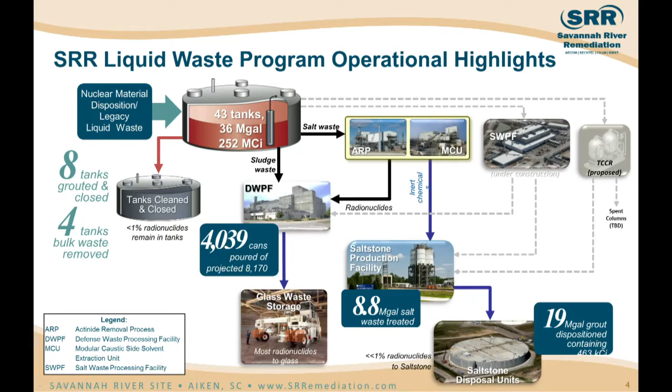But DWPF has processed around 4,000 canisters, which is right around half of what we're projecting it'll have to produce in its mission. The other 33 million gallons of waste is collectively called salt waste. That's divided into two portions. About half of it is salt cake. It's precipitated salt solids that are also in the bottoms of the tanks. If you think of a salt block like you'd have for livestock, it's very hard like that. Then the remaining 17 million gallons of salt waste is dissolved salt solution, which is sitting on top of the salt cake.

Before the salt cake can be processed, it has to be dissolved, and even the liquid salt waste requires some chemical adjustment so that it can be processed. So that 33 million gallons of salt waste turns into a little over 100 million gallons of feed for the salt processing facilities: ARP, which has been running since 2008, SWPF, which will be coming online here in 2018, and then in Rev 20 of the plan, the TCCR unit, which I'll discuss.

The system is designed so that the vast majority of the radioactivity, the 252 million curies that we currently have in the tanks, ends up vitrified in glass canisters that will be disposed of at a federal repository. Less than 1% will remain in the tanks after they've been cleaned and be grouted as part of the tank closure, and much less than 1%, less than 800,000 curies, will be solidified in the grout at Saltstone.

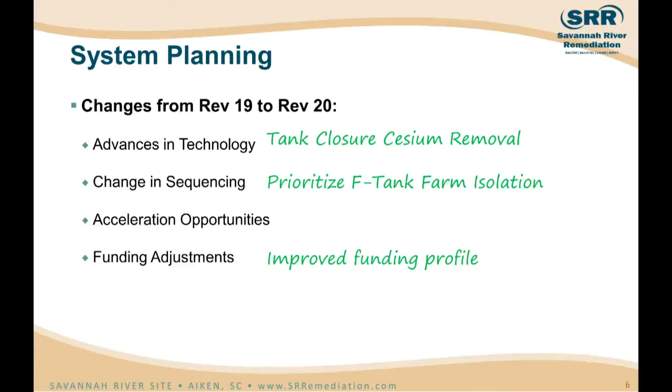For this plan, they asked us, after the type 1 and 2 tanks in H area have the waste removed, to target our efforts on getting the waste out of F tank farm so that tank farm could be isolated, therefore significantly reducing the cost of infrastructure maintenance for the whole liquid waste program. And as I mentioned, this plan also has a significant funding improvement over the previous plan.

Some other inputs that drive the outcomes. SWPF is expected to start up in December of 2018. We expect to continue to receive waste from H Canyon through 2025, and then they'll flush their facility out in 2026. We assume that glass waste storage building number 1 will be completely double stacked with 2 canisters for each storage location. That increases our storage capacity by over 2,200 cans, and I'll explain in a couple subsequent slides why that's important.

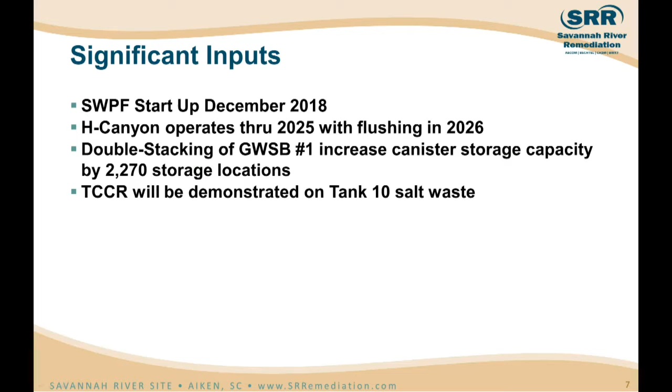And as I mentioned a couple times, the tank closure cesium removal, or TCCR, will be demonstrated on tank 10. The TCCR unit is a unit that's procured from a vendor that we will supply dissolved salt solution out of tank 10. The unit will remove cesium, with the decontaminated stream being returned to tank 11, where it is then transferred to saltstone for incorporation into solidified grout.

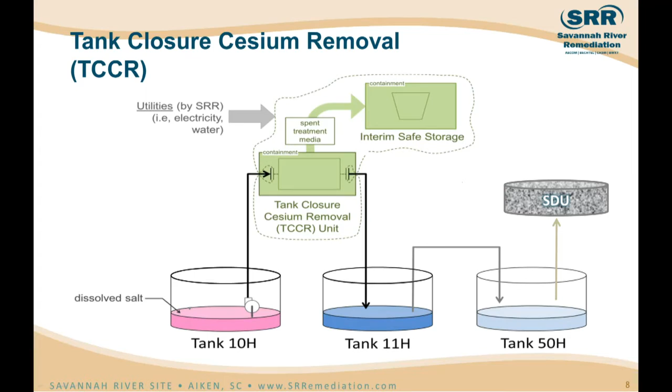The unit, which will be ion exchange, will produce a loaded resin column. Our objective is to find an off-site disposal location for that column. The column is designed, however, so that if off-site shipment cannot be arranged, the resin can be introduced into the DWPF feed stream and vitrified, ultimately ending up in one of the canisters. For this plan, the base case of Rev 20, we are assuming that we just do a demonstration of the viability of the technology on tank 10.

If you look at Rev 19, which was issued 2 years ago, by far the most significant outcome from that modeling effort was that the constrained funding profile we were given to model against resulted in SWPF not being able to operate at its rated capacity because the rest of the liquid waste system couldn't support it. And there's several things there. We could not afford to construct SDUs fast enough so that both ARP/MCU and SWPF could run at rated capacities. By not running ARP/MCU at the rated capacity, that limited our ability to feed SWPF when it started.

We also are required to make some modifications to DWPF and saltstone so that their capacity can be increased higher than it is today to support SWPF at higher throughputs, over 7 million gallons per year. And we also could not afford to begin construction on the 3rd glass waste storage building, which in the Rev 19 modeling was required to be in service by 2019. So at around $100 million, there was a significant investment required in FY16, 17, 18 to have that new building built, and that also would not fit within the funding profile.

So as a result, Rev 19's cumulative salt processed through SWPF was about 15 million gallons below what the facility would be rated to do. And that, at a top end of 9 million gallons per year, adds 2 years to the liquid waste life cycle on the back end, but it also delayed removal of waste from the old style and salt tanks in the near term.

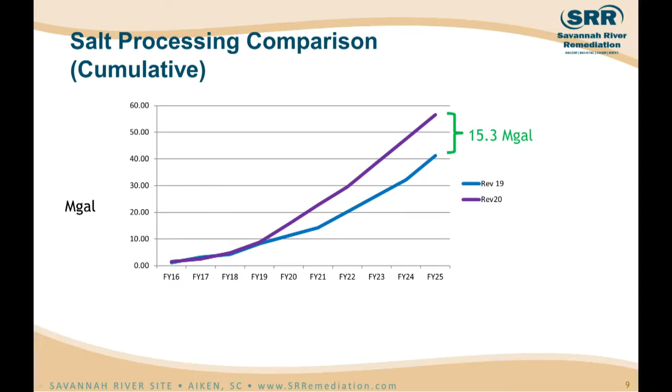With a significantly improved funding profile for Rev 20, all of those things I stated before have been relieved. And with the inclusion of the double stacking of glass waste storage building number 1, which alleviated the need for heavy investment on the front end for a 3rd glass waste storage building, those revisions to the inputs allow us to fully support SWPF at the rated capacity when it operates, giving us a significant increase in cumulative salt processing.

So looking at the timeline, what we get relative to waste removals and tank closures from SWPF running at full capacity, we can see that all of the bulk waste is removed from F area type 1 tanks, primarily tanks 1, 2, 3, 4, 7, and 8, by 2023. Those tanks then enter heel removal and isolation, with closure finally occurring in FY32. We then, as I mentioned, target the waste that is in the type 3 tanks in F area before retrieving the final waste out of the type 4 tanks in H, which are old style tanks.

So by 2029, the bulk of the waste is out of F area with those tanks being closed early in the 2030s. The final waste comes out of type 4 old style tanks in H area in 2030, with the type 3 tanks a couple of years later, final closure in 2039.

One of the things you'll notice looking at this particular timeline is that with SWPF operating at the rated capacity, a significant portion of the funding that is available is used to construct new SDUs and to do bulk waste removal from salt tanks so that SWPF can be fed, and therefore a lower priority is placed on final isolation and grouting of the old style tanks.

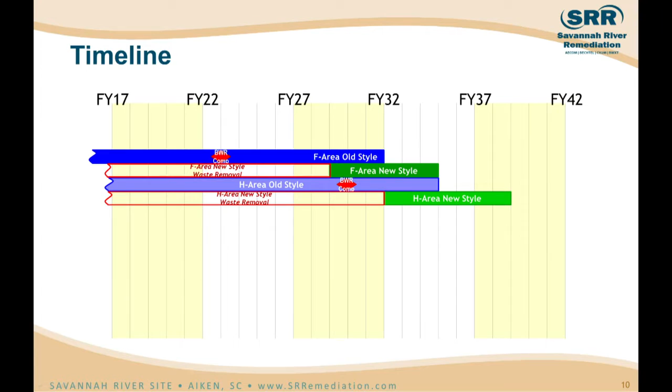Some other dates of interest in Rev 20, the base case. The need date for SDU 6 is January of 2018. I know you've been briefed several times on the status of that disposal unit, so one of the things you'd like to keep the pulse of is when SDU 6 is going to be available. The current schedule has it available early in calendar year 2017, so there's still significant margin over the need date for SDU 6.

Another thing the CAB should keep an eye on is construction of SDU 7. It's needed in November 2020, and I know that seems like a long way out in the future, but it takes about 4 years from when groundbreaking begins till the unit is ready to have waste disposed, which means we need to start activities on SDU 7 in 2017. Being a significant investment for DOE, that's one of the things that requires specific congressional approval to begin. And so as the FY17 budget process unfolds, we need to keep track of our ability to start construction on SDU 7.

With the complete double stacking of Building 1, the third glass waste storage building or subsequent canister storage is not required till 2029. And next generation solvent is deployed at SWPF at the end of the third year of operation. That's an important date because the next generation solvent allows us to operate SWPF above the maximum 7.2 million gallons with the current or baseline solvent, up to as high as 9 million gallons per year. So we get additional throughput, and it also has a higher cesium removal efficiency.

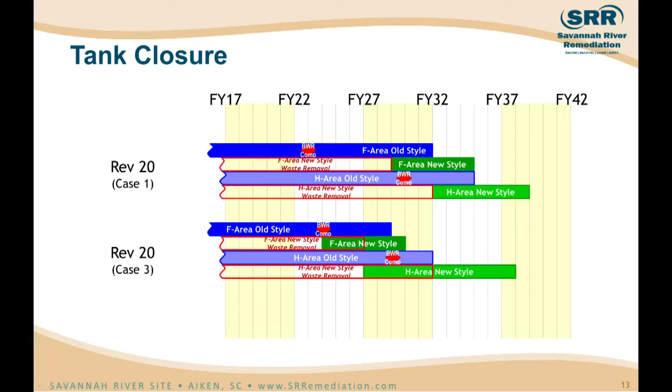In this case, in 2028, we're able to cut the inter-area transfer line so that all the waste is out of F area. The surveillance and maintenance cost drops significantly at that point in time. You'll also see a slight acceleration in removal of the waste from the H area old style tanks, and then essentially an acceleration in the end of the life cycle as well.

So just in summary, the big soundbite for Rev 20 is that the significantly improved funding profile over Rev 19 from 2 years ago allows us to fully support SWPF at the rated capacity. Supporting SWPF at the rated capacity is by far the most important attribute of shortening the life cycle of the liquid waste program. Some additional funding could allow us to deploy a second TCCR unit, which accelerates some of the bulk waste removal, and you will also obtain a little bit of life cycle acceleration. So with that, any questions?

I kind of talked fast there, I'm sorry.

Pete, is it possible that you could go back over the TCCR unit? Yes. I'd like to know, is that a physical or chemical or electric unit? What kind of unit is that, exactly? Yeah, it's ion exchange.

So you process salt waste through a column that has a resin loaded inside it. That resin has an affinity for cesium. So when the salt waste containing cesium passes through the column, the cesium molecules adhere to the resin, and therefore the salt waste that comes out of the unit has been decontaminated. So it's a chemical process. Obviously it has pumps, so it'll have electrical hookups and that kind of thing, but the cesium extraction is a chemical process.

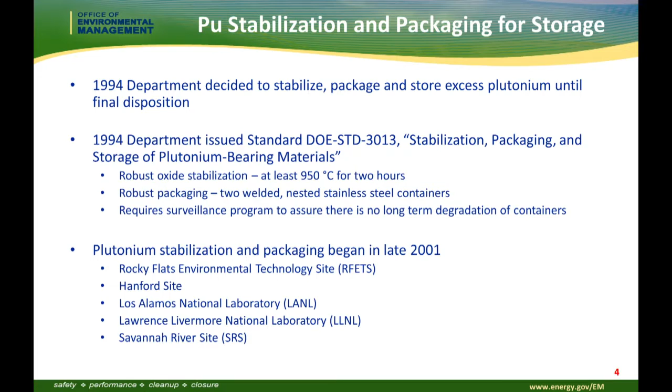The department began packaging in late 2001. Rocky Flats Environmental Technology Site out at Denver, Colorado was the first site that started up. Hanford, Los Alamos, Livermore, and Savannah River came kind of almost in that order, although I think Livermore was before Los Alamos.

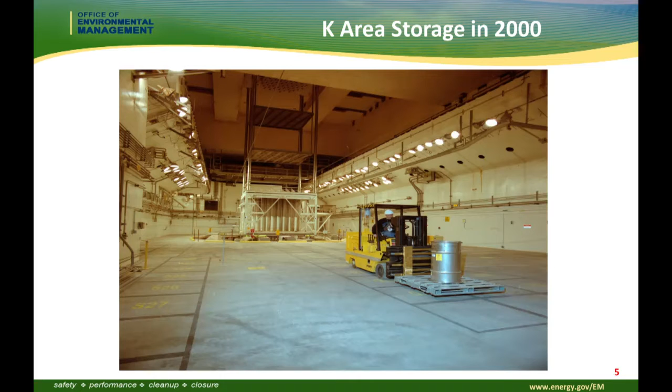What is the storage configuration we have? I talked a little bit about the 3013. When it's loaded with plutonium, it weighs approximately 30 pounds. It's about 10 inches tall, 5 inches in diameter. Those are placed inside of 9975.

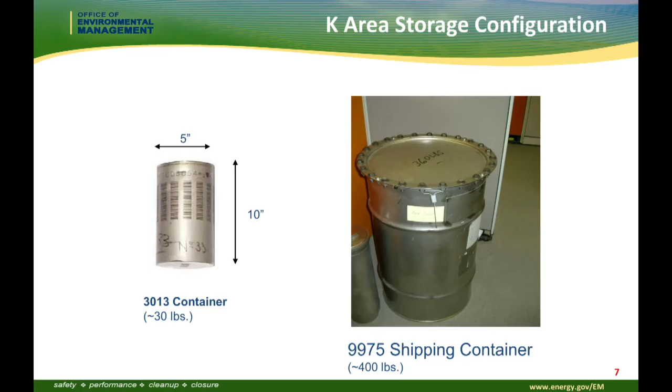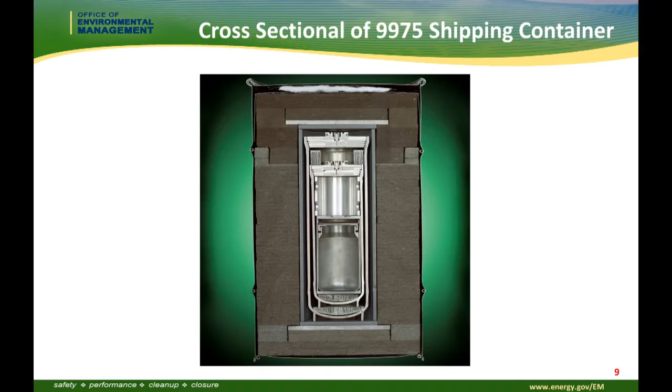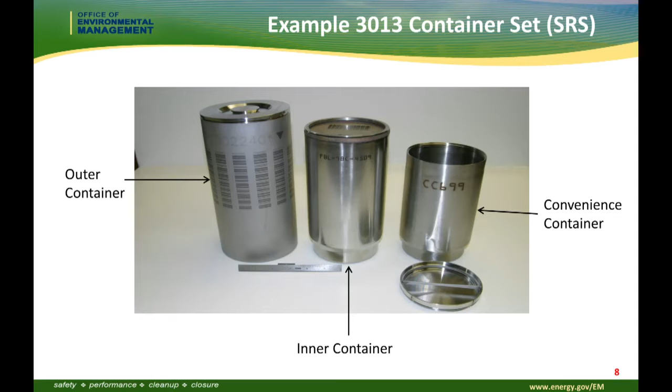Go back. Kind of give you an idea of the 3013. You've got the outer container, which can be certified as a safety class component. You've got an inner welded container, and then like I said, normally you have a convenience can. The whole idea behind the convenience can is when you're welding this, you do not want loose plutonium oxide around there. You'll end up with plutonium in the weld.

Where are we on the surveillance program? We had an approved program plan in 2003, as approved by Assistant Secretary Jessie Roberson at the time. We have a working group that is made up of personnel from Savannah River, Hanford, Los Alamos, and Livermore. They are some of the experts within the department. They direct what we have called the shelf life program. Los Alamos holds a sample of every type of material that is stored in K area today. We have both small scale and large scale samples.

They take thermal tests on them. They determine the gas atmosphere around the material and all of that. We also are doing some corrosion tests at both Los Alamos and Savannah River National Laboratory. What we're trying to do is force the container to have a stress corrosion crack, so we will know how that reacts and what causes it, because we see that as the only credible scenario that could cause a failure of the container, but it would not be catastrophic, it would just be a crack.

And then we have 3013 containers that we do examinations on. We pull them out of K area and we actually cut the cans open. We take samples of the material, we take samples of the gas, we actually take the top of the container up to SRNL, and we bend it at the weld joint to see if we see any cracking and all of that. That is all based on a randomly generated group, and then we have ones that the MIS people select. Usually they're the highest chlorides and the highest moisture content.

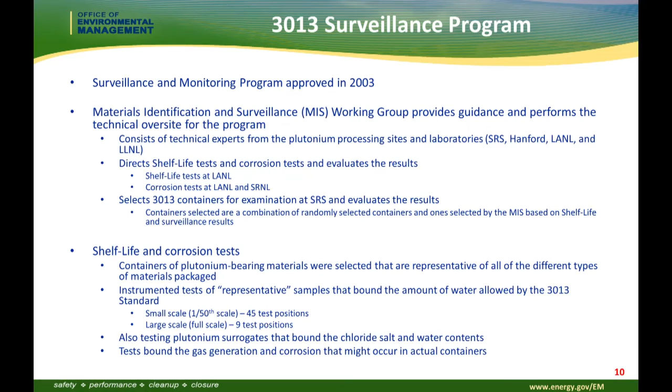And again, I've talked about the shelf life program. We have 1/50th scale, with 45 positions. We have large scale, 9 positions. And we also have some that are using surrogate material because we are concerned with the chlorides and the corrosion.

We've been doing both NDE and what we call DE, or destructive and non-destructive. We are no longer doing non-destructive. We did over 40 containers a year for about 8 years, and that fulfilled the randomly generated number that we needed to have a 99% assurance that the material stored in the facility would not have an issue. We started doing NDE in 2005. Began doing the destructive examinations in 2007. The reason for the gap is we wanted the material to be in the containers a minimum of 5 years, because if you did it earlier, you really wouldn't see any corrosion. So we waited 5 years to start the destructive examinations.

What we look for is gas composition and pressure. Again, we look at the metallurgical. We look at the physical and chemical analysis of the material. We started in 2007 doing 18 a year. We did that for a number of years. Based on the results we're seeing, we are now down to doing 6 a year, and these include both random and selected ones. Right now, we will see doing surveillances as long as we store material in K area. We do not see a reason that we would discontinue the DE unless we're dispositioning it all. But if it's going to be in long-term storage, our assessment is we need to continue to do surveillance.

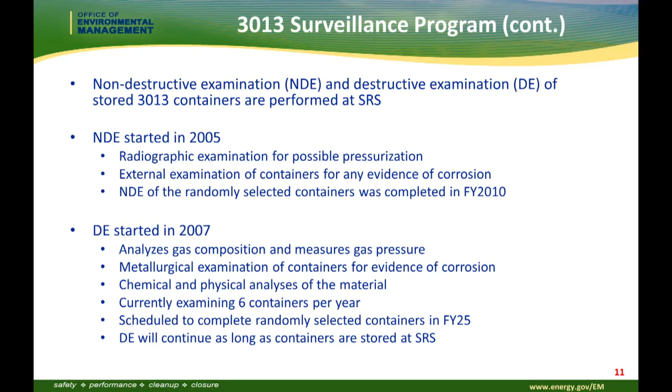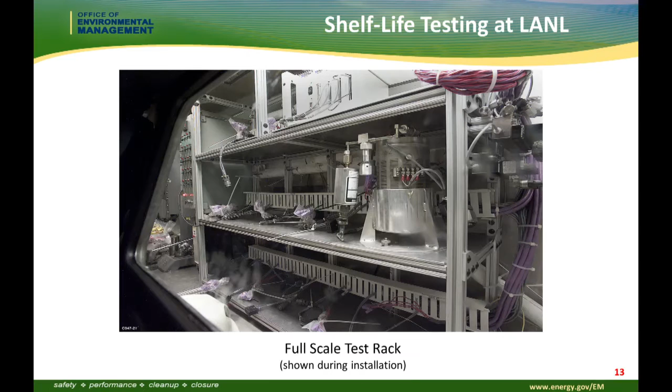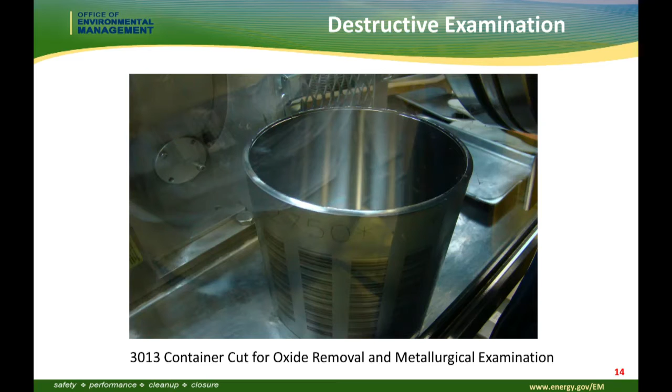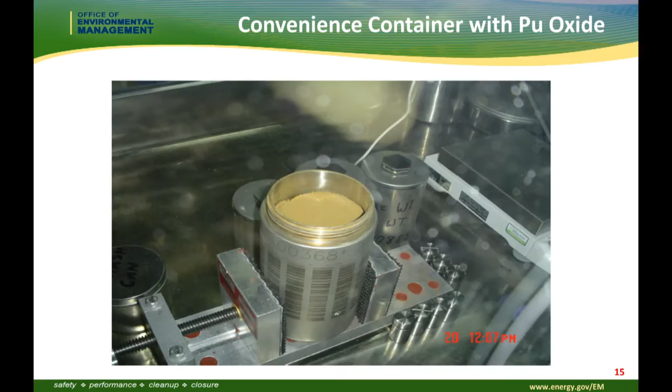This is a picture of a can that we cut open here at Savannah River where we did the destructive examinations to look at the metallurgical property or condition of the container. This is a picture of one of the convenience cans that we did destructive with the plutonium powder in it. Again, that's the powder dumped out. You really can't see it very much, but that's what it looks like.

All right, what have we seen so far? We designed the container for a design pressure of 699 psi. We've seen less than 10 psi in the containers. So clearly, when we were concerned with pressurization when we generated the standard, that was not a real concern, although we thought it would be. We aren't seeing any flammable gas mixtures in the can itself. We do have hydrogen in the can, but there's no oxygen present, so there is not a flammability issue inside the cans.

We have seen some corrosion, and that's one thing with the standard that when we originally started it, we did not think we would see any corrosion because we were drying the material to less than 0.5% moisture. However, we are seeing it. Usually it's in the gas space or right at the oxide atmosphere space. We think it's from the moisture generating hydrochloric acid in the atmosphere.

It's kind of hard to tell because when we pull the gas samples, if there is any hydrochloric acid, it plates out on the stainless steel line. So even when we pull the gas samples, we really can't tell if there's any hydrochloric acid. But what we're seeing is all inside the inner can. We've seen none on the outer 3013 can, which is our safety class barrier.

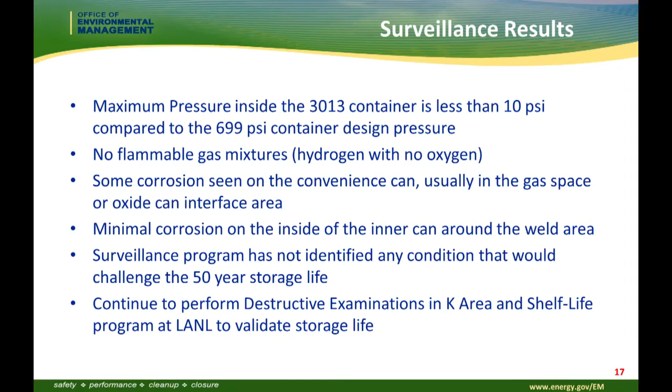We've not identified any condition that would challenge the 50-year storage. Right now, even on the inner cans, we see them lasting 50 years. So that's before you even get to the outer can, then you've got the outer can itself. We will continue to do destructive examinations, and we'll have the shelf life program going on at Los Alamos during storage. In summary, we don't see anything that challenges the safety boundary of the material stored in K area. Are there any questions?

Susan? Very nice presentation, thank you. I just have a few questions because I'm always trying to learn things here. So when you say that you're driving off the moisture? Organics, moistures, anything that would cause a pressurization in the can and cause a potential corrosion in the can. So that's why we're baking it at 950 degrees. And that 950 degrees is not in a 950 degree oven. That is actually what the center of the cake or the bed of the oxide gets to, 950 degrees, and you have to hold it for 2 hours. Okay, and that basically drives all that out.

So I wanted to talk about whether you can see these if they start to leak. How would you know? And you did explain a little bit about that later on here. You said there was testing where they were dropped and all that. Is it simulated, or is it if the building caught fire? These have been put through a fire test also out at Sandia National Laboratory, where you put it in a pool of jet fuel. You heat it up for 30 minutes at 1,475 degrees, and we've seen that both the O-rings that are sealing this, neither one of them are losing any containment.